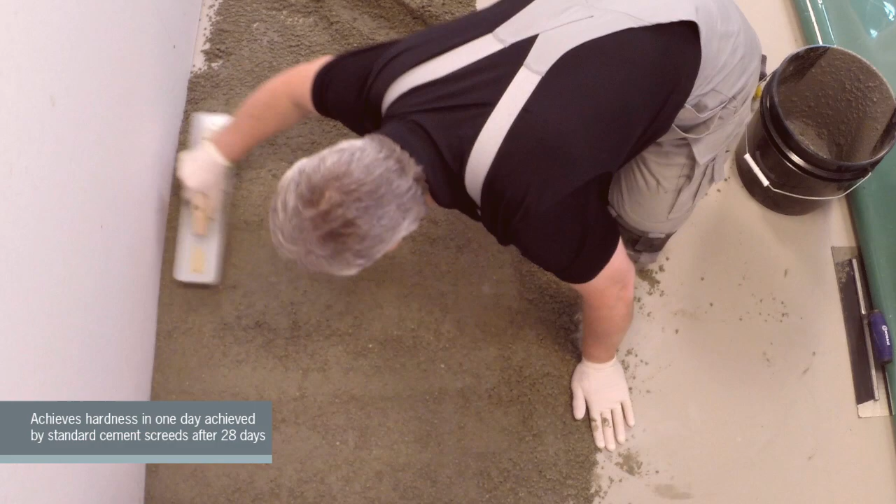ARDEX A38 Rapid Set Screed, a precision-engineered, polymer-modified, high-performance screed with rapid setting and drying properties. Install tile and stone in only 4 hours. Achieves hardness in 1 day, achieved by regular cement after 28 days. Ideal for bonded, unbonded, and floating screeds. Unbonded applications do not require mesh.

ARDEX A38 Mix in 40-pound bags is a convenient 5-to-1 pre-mixed screed with sand and aggregate included. ARDEX A38 cement binder without sand and aggregate is available in 50-pound bags for installers who prefer to add aggregate.

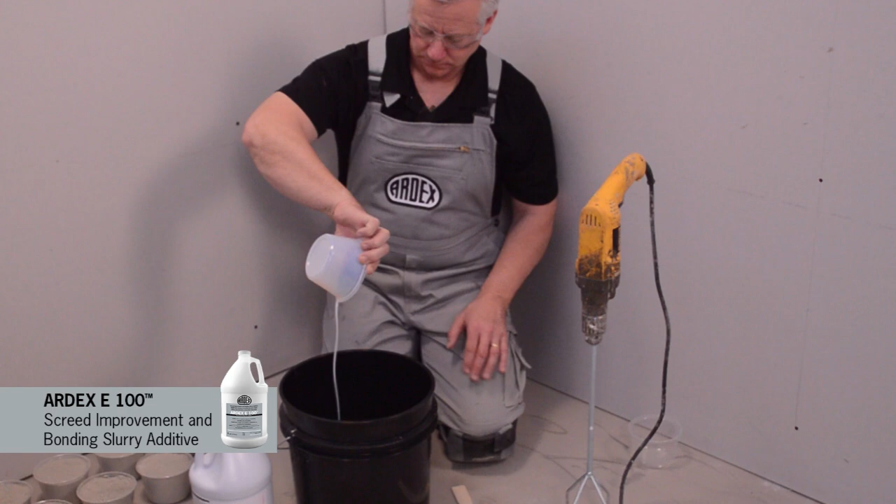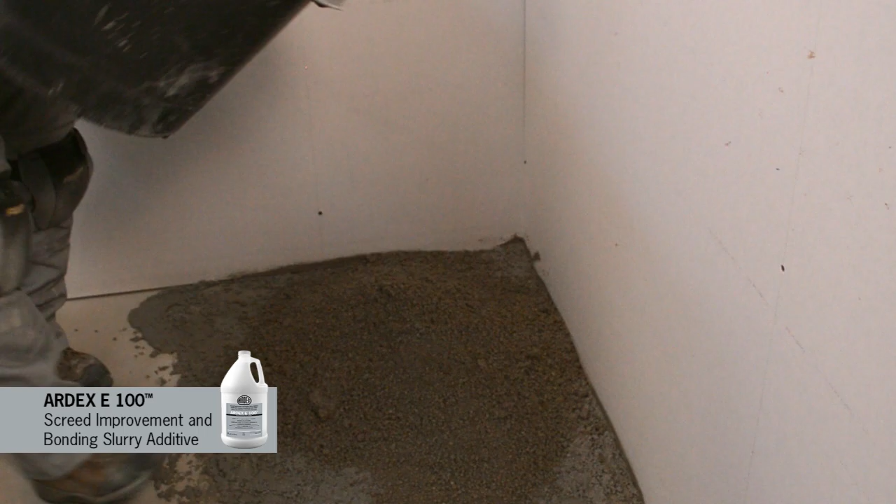ARDEX E100 Screed Improvement and Bonding Slurry Additive is available for bonded screed slurry applications. ARDEX E100 also provides enhanced strength and elasticity when added to basic screeds. ARDEX A38 Mix is used in all 3 of the following installations.

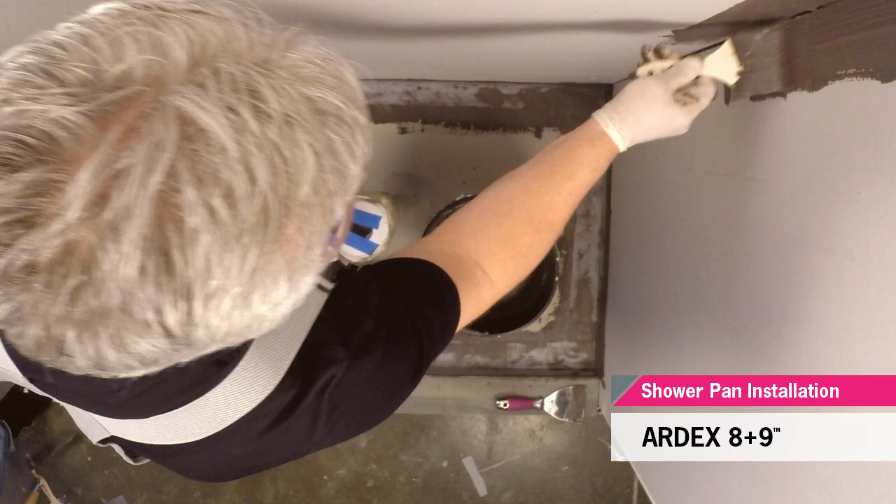The shower is prepared with ARDEX 8+9 waterproofing compound for the shower pan liner and for waterproofing on the walls. The drain surround is prepared with ARDEX SK Drain pre-cut mesh. ARDEX 8+9 is cement base for an ultimate bond with tiling mortars. Screed may be placed or tile set in just 90 minutes.

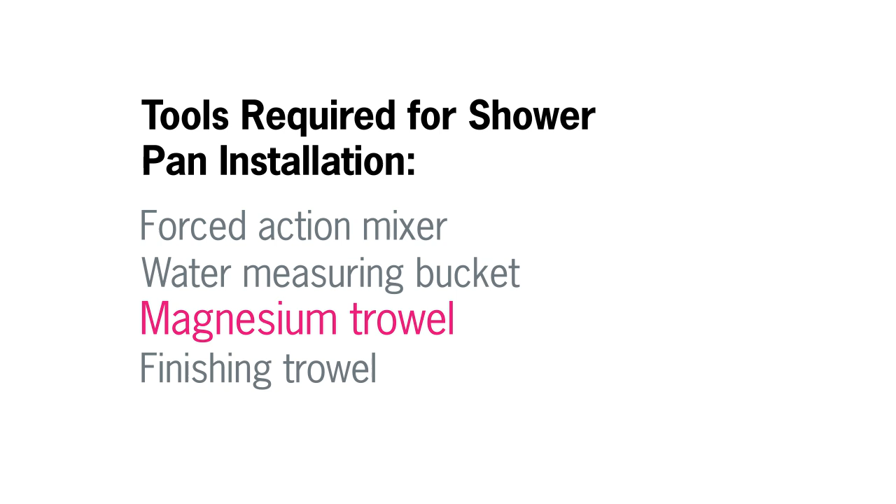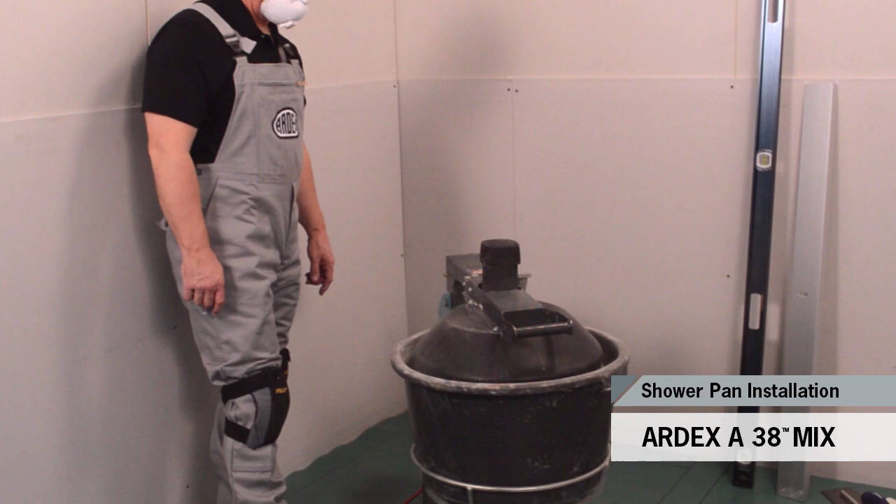Tools required for shower pan installation: forced action mixer, water measuring bucket, magnesium trowel, finishing trowel. ARDEX A38 Mix, featured in this video, should be mixed in a forced action mixer. Pour the A38 mix into the mixer and blend. For each 40-pound bag, 1 quart of clean water is needed.

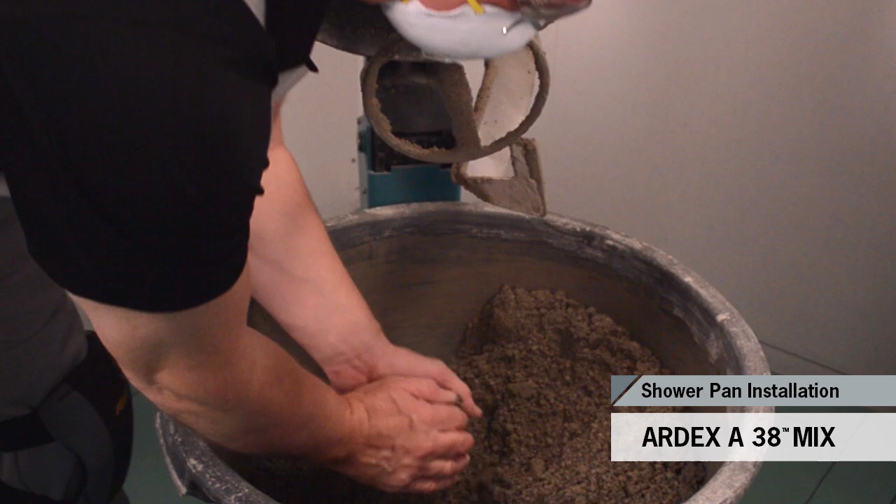When mixing begins, pour in half the water. Add the rest during mixing, which is approximately 2 to 3 minutes. When mixed properly, the mortar, when squeezed into a ball, should retain its shape and not crumble. The hand should be slightly moist.

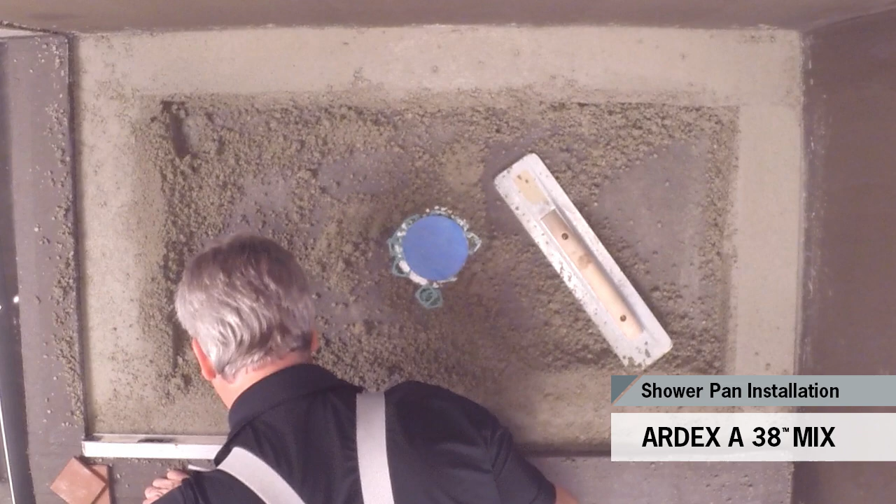Build a screed rail around the perimeter. Before the rails set, fill in the remainder of the shower pan and bond to the screed rails, wet in wet. This is a rapid setting screed. Warmer temperatures may cause the screed to set faster. Continue to place the A38 mix and pitch the screed to the drain. Finish the pan by smoothing the surface of the screed.

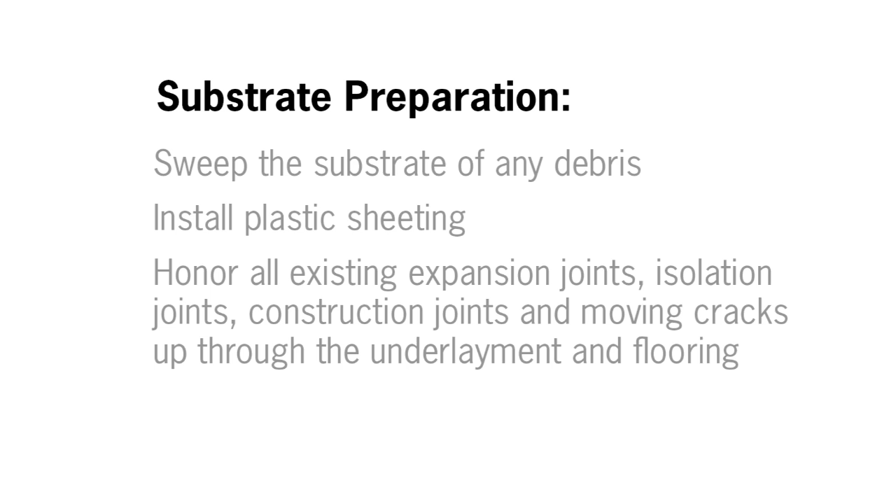Unbonded installation. Sweep the substrate of any debris and then install plastic sheeting. All existing expansion joints, isolation joints, and construction joints, as well as any moving cracks, must be honored up through the underlayment and flooring. Bay divisions and expansion joints should be incorporated per TCNA standards for cement and sand screeds. Dormant cracks and control joints can be filled with ARDEX ARDIFIX. Please be sure to read technical data sheets for complete instructions.

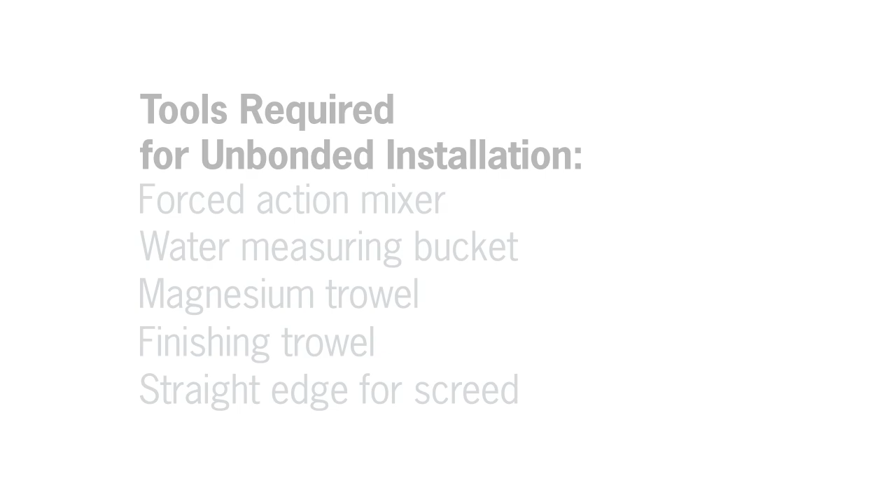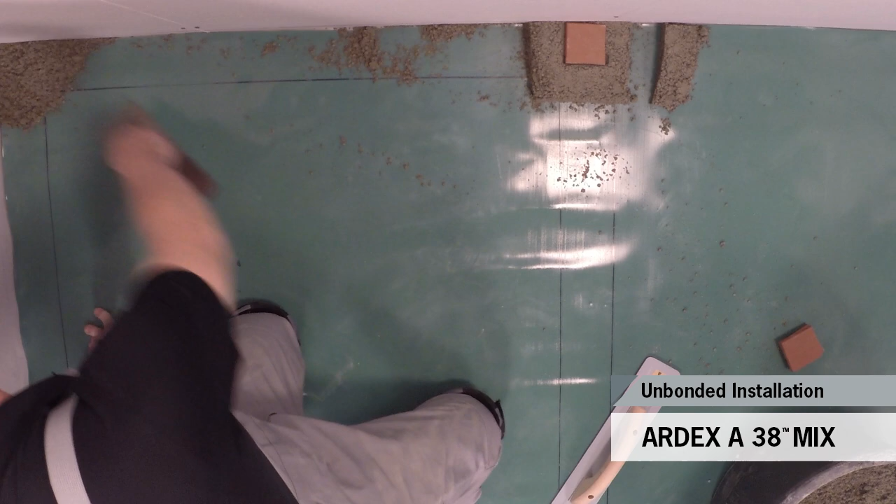Tools required for unbonded installation: forced action mixer, water measuring bucket, magnesium trowel, finishing trowel, straight edge for screed. Mixing is the same for this installation as the shower stall installation. Plastic sheeting is placed over the substrate for unbonded applications to prevent the screed from bonding to the substrate. It also creates a moisture vapor barrier.

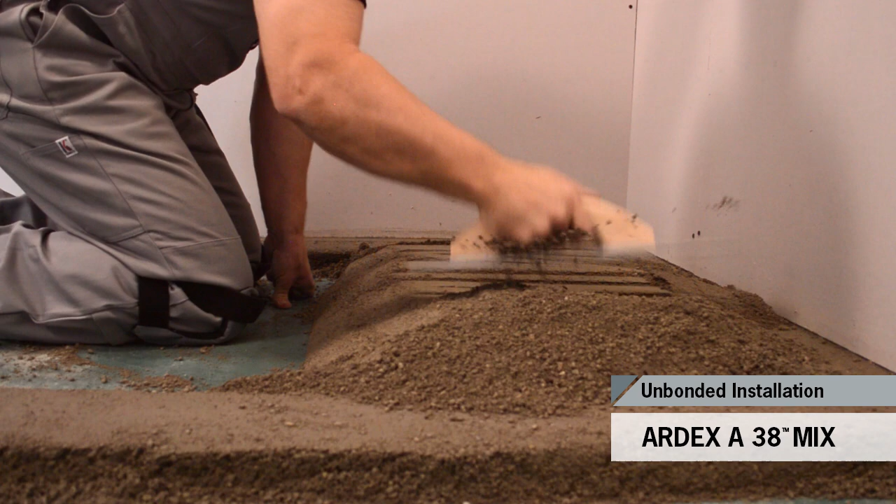Build screed rails for each section. Before rails are set and dry, fill in and bond to the rails wet in wet. This is a rapid setting screed. Warmer temperatures may cause the screed to set and dry faster. Proceed with filling the bay with A38 mix. Using the straight edge, pull and place the screed. With a trowel, smooth the screed surface, tamping down to compact the screed as needed.

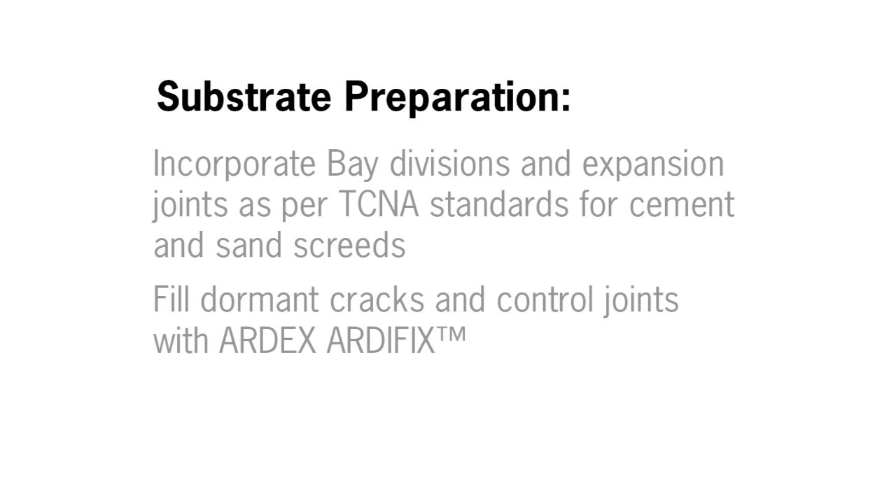Bonded installation. The substrate must be dry, flat, structurally sound, and free of contaminants and weak surfaces. The concrete must be profiled to a minimum surface profile of CSP 3. All existing expansion joints, isolation joints, and construction joints, as well as any moving cracks, must be honored up through the underlayment and flooring. Bay divisions and expansion joints should be incorporated per TCNA standards for cement and sand screeds. Dormant cracks and control joints can be filled with ARDEX ARDIFIX. Please be sure to read technical data sheets for complete instructions.

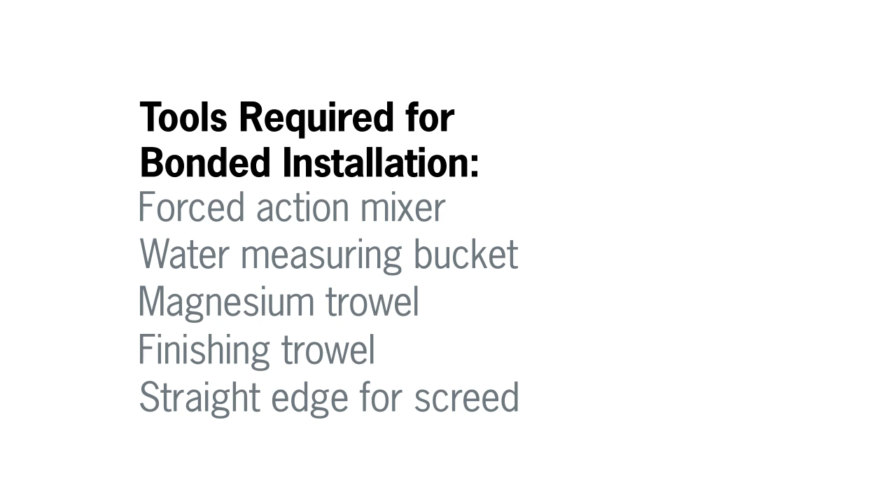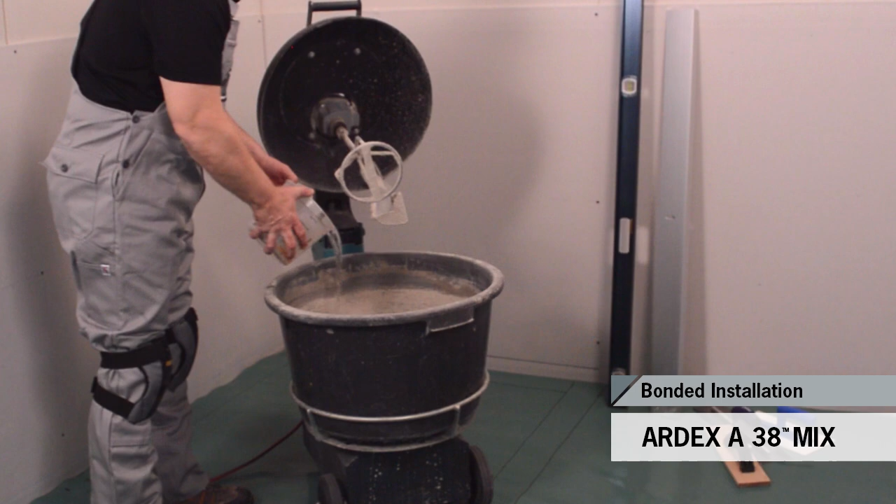Tools required for a bonded installation: forced action mixer, water measuring bucket, magnesium trowel, finishing trowel, straight edge for screed. For the bonding slurry: mixing bucket, drill and mixing paddle, stiff bristle brush. Mixing is the same for this installation as the shower stall installation. To install ARDEX A38 mix as a bonded screed, a bonding slurry must be applied to the substrate. Mix 8 parts ARDEX A38 mix, 1 part ARDEX E100, and 1 part water by volume.

Pour the water and ARDEX E100 into the mixing container. Add ARDEX A38 mix. Using a drill, mix to a creamy consistency. Scrub the bonding slurry into the substrate using a stiff bristle brush. Immediately apply ARDEX A38 mix lift while the slurry coat is still wet. If the slurry coat is allowed to dry, it must be removed mechanically and reapplied before ARDEX A38 mix lift is applied. Pull the screed with a straight edge. Finish and smooth the screed with a trowel, tamping the screed as necessary to keep it compact.

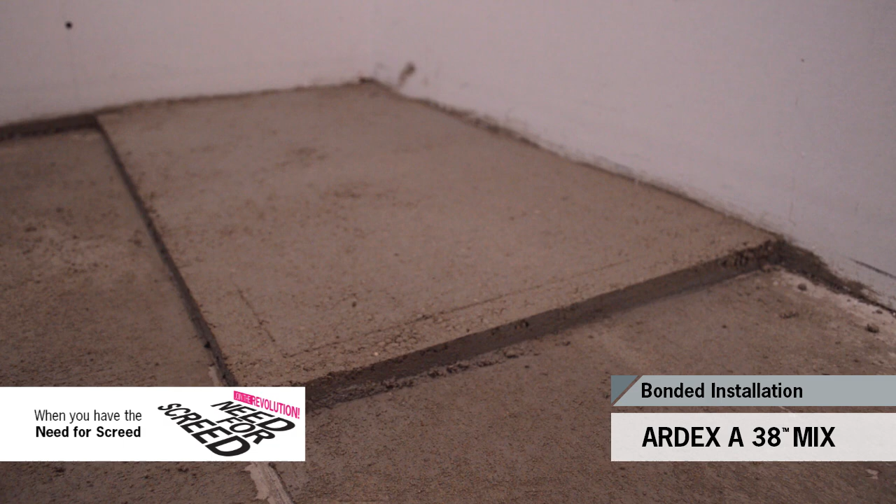ARDEX A38, when you have a need for screed.